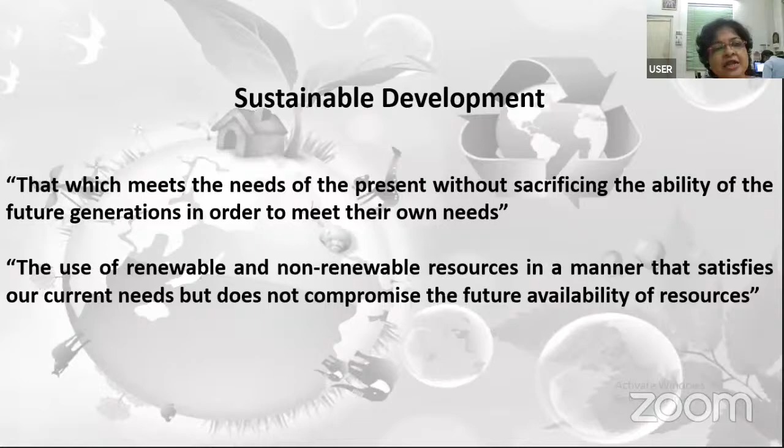Now, before directly going to our topic, let us first discuss or share the result where we want to reach, because we already know where we are. We are going to throw away our waste material. We are going to overlook the outcome that is going to be generated from various factories, various establishments, various sectors. This is our current scenario.

But the time has come to be aware of where we should reach at this current time. So that's why we are going to share in which way we can derive some kind of profit from the material for which we are not going to bother.

Just see, if we consider a typical community with 1 lakh population, per day the average waste produced is 50 tons, with 70% wet waste. 70% wet waste means 35 tons are wet waste.

Now see, in the subsequent slide, we will discuss the various technologies or processes by which we have to think of deriving wealth or energy from the waste. This particular slide, in a nutshell, will let us know where we should reach, and whether the time has already come to think in this direction. So this particular slide will give you a roadmap for our future steps.

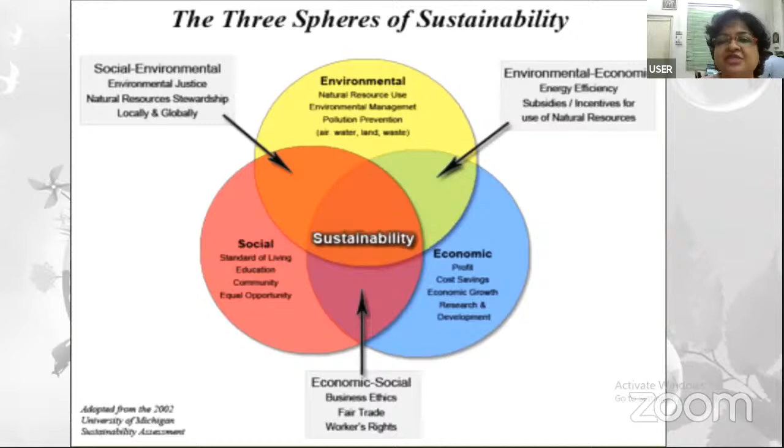So that's why we are coming to discuss circular economy now, because from that particular concept of TBL, triple bottom line, we come to discuss this circular economy. The concept of circular economy was first raised by British environmental economist Pearce and Turner in 1990.

Traditionally, an open-ended economy was developed with no built-in tendency to recycle, which was reflected by treating the environment as a waste reservoir - whatever waste is generated, throw it away, we should not bother about that. But what is the aim of circular economy? Why is this circular economy coming ahead in this current generation, in this current scenario?

Because again, the concept of Deming's wheel has come - PDCA, Plan, Do, Check, Act. It is not an open-ended thing, it is a circular one, a continual approach. We have to reduce the resource so that the system functions in an optimal way.

We are talking now about the establishment of a special economic zone - that is the implementation of the approach of circular economy, because you know that a thermal power plant is going to generate a lot of ash.

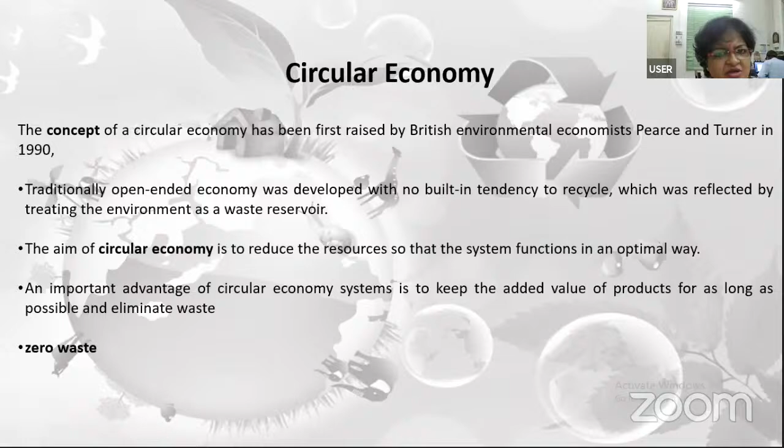Should we ignore that ash? No, because if we ignore it, the company has to bear its transportation cost, disposal cost, etc. But if we think of the concept related to special economic zone, that means if any Portland Pozzolana cement manufacturing industry can be established very near the thermal power plant, then for that industry, the raw material will be that ash. So collection of raw material from thermal power plant to that cement industry will not have any long distance issue, so the transportation cost will be reduced, sometimes zero, and the disposal cost for the thermal power plant will become zero. So the total country will incur a lot of benefit. This is nothing but the circular economy.

This circular economy concept we are going to follow in this particular approach. The name of that approach is cradle to grave management. Cradle to grave management is the product life cycle, throughout the life cycle of the product, from incorporation of the raw material up to getting the finished product. There is the possibility of generation of waste at each and every corner. So at each corner, we have to think of reusing, recycling, recovering that waste, so that it can be utilized for the same unit as raw material or intermediary material, or if not possible, then it can be utilized for other units, other factories, other enterprises.

What is found, as I explained in case of thermal power plant versus Portland Pozzolana cement manufacturing unit, ash is getting taken as raw material for the cement manufacturing unit. In this way, the transportation cost of raw material or disposal cost of waste will become zero, and the company will incur benefit. This strategy aims at taking into account sustainability impact - environmental, economic, and social issues that a product or service will have throughout its life cycle, from cradle to grave. Throughout the life cycle of the product, we have to think of optimal utilization of the resource. And as you optimally utilize the raw material, the generation of waste will also be optimal.

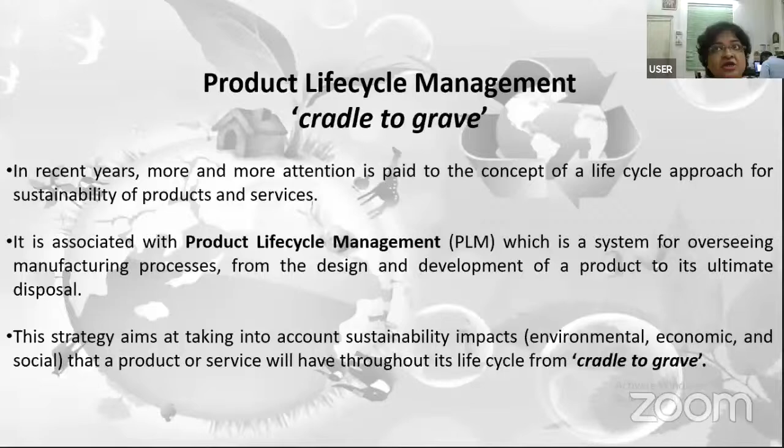Now let us discuss this particular fact. If we always talk from theoretical perspective, it will be boring. So let us discuss some case study to show the sustainability.

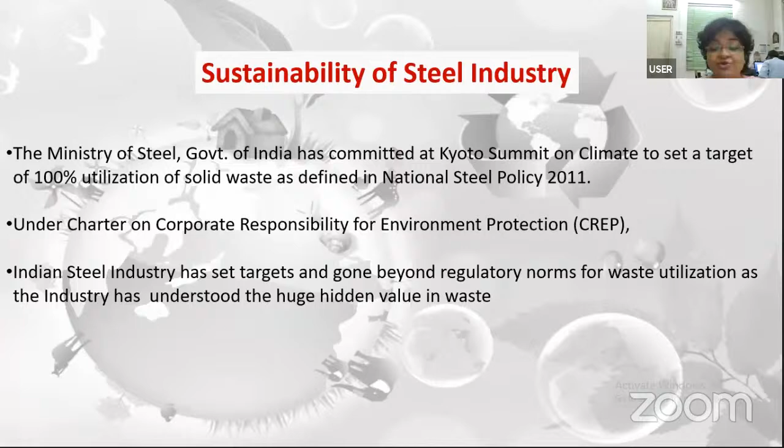Suppose we take the example of the steel industry. The Ministry of Steel, Government of India has committed at the Kyoto Summit on climate to set a target of 100% utilization of solid waste as defined in the National Steel Policy. Now our question is, in which way have they committed? Definitely they have certain proof that they are capable of doing the same, because India's steel industry has already set targets and gone beyond regulatory norms for waste utilization, as the industry has understood the huge hidden value in waste. So we should know the sustainability indicators for steel industry. Once we find out the sustainability indicators, only then will we be able to adopt a strategy for implementation.

Here are certain indicators. If we think of conservation of natural resources used in steel making, like coal etc. If we think of reduction of greenhouse gas emission. Third indicator, volatile emission reduction. Fourth indicator, landfill waste reduction. And fifth indicator, hazardous waste indicator. So these are the various sustainability indicators based on which the steel industry is thinking of deriving wealth from waste.

Now, one by one, we are going to see in which way they are thinking of that. In a nutshell, in the steel industry, the inevitable wastes are slag, dust, fines, slurries, various scales. All integrated iron and steel plants produce a wide range of byproducts, and processes are being continually optimized to reduce the amount of byproducts generated. These byproducts are often termed as waste. So under waste, they have focused on slag, dust, fines, slurries, and various scales.

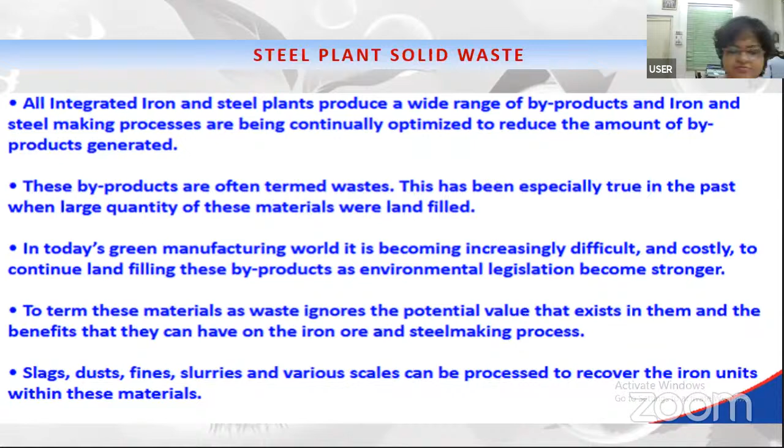Now, for doing that, again theoretical concept, we are going to follow this concept: reduce, reuse, recycle, recovery, and finally landfill. So from most favored option to least favored option, we have to go ahead. Whenever we find there is the opportunity or scope of generating waste at a particular location, first we have to think: now we have to reduce, to lower the amount of waste produced. Next concept is reuse: how to use that material repeatedly.

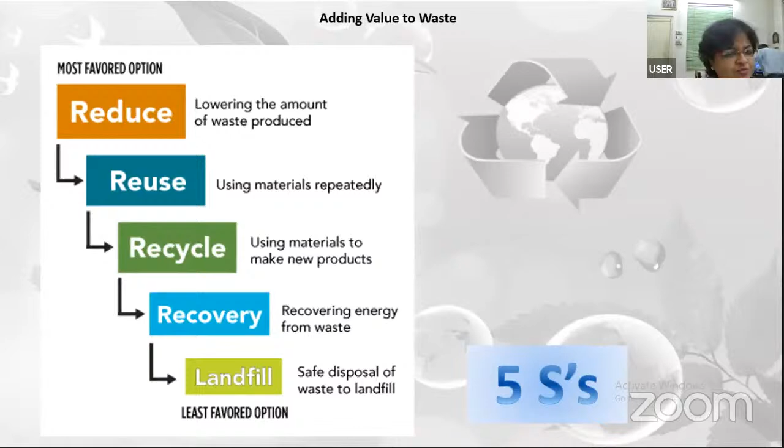Third, recycle: how to use that material to make any new product or intermediary product. Fourth, recovery: how to recover energy from waste. And if all these four steps fail, then finally is the landfill. But that should be the safe disposal of waste to landfill.

Now, what are the reasons why we are going to think of so many strategies? Definitely there are some advantages, some benefits. What are the reasons, one by one? First, it preserves natural resources by decreasing the demand for virgin materials, so there will not be over exploitation of natural resources. We are going to think of natural resource conservation.

We will conserve energy. We will be able to reduce greenhouse gas emissions, which cause global warming. Definitely that is not expected by us. In this way, we are going to reduce the demand for products made from energy-intensive manufacturing processes.

Thus, we will be able to save money by decreasing disposal cost. In case of a thermal power plant, if they can easily transport ash to the Portland Pozzolana cement manufacturing unit, the disposal cost will become zero for the generator. Similarly, the material cost and transportation cost of raw material for the cement manufacturing unit will also become zero. So in this way, we are thinking of adoption of special economic zones.

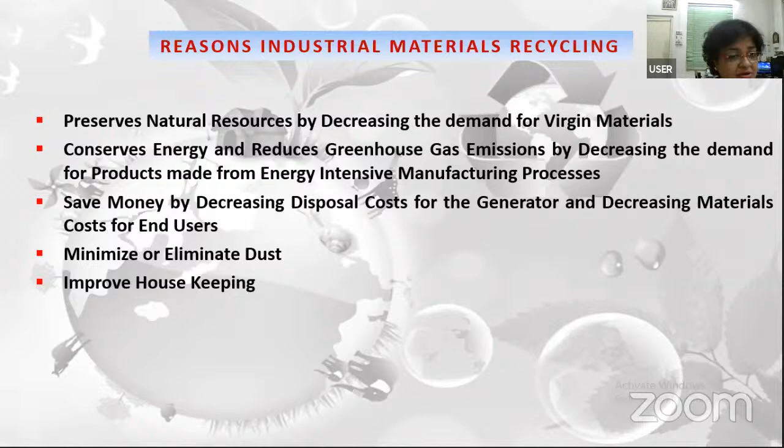Fourth benefit, we are going to minimize or eliminate dust. And finally, we are going to improve housekeeping. So our whole ambience, from health, safety and environment point of view, is going to be neat and clean, which will cause the betterment of our life.

So already we have discussed the various wastes coming out from the steel making industry. Now it is clear that the waste generated from steel making industries are slag, dust, fines, slurries, and various scales. If we categorize these wastes, they can be grouped into 4 major divisions: one is iron and steel slag, second is scale, third is scrap metal, and fourth is dust and sludge.

Once this classification is made, it becomes clear how we will think of deriving wealth from waste. Depending on the type of waste, this classification is very important because it will be easier to adopt future strategy for the same. We can think of it as a source of energy or raw material for steel fabrication, or else it can be traded as a co-product to other industrial applications. So the reuse of this product is of great importance for the sector, both from economic and environmental points of view.

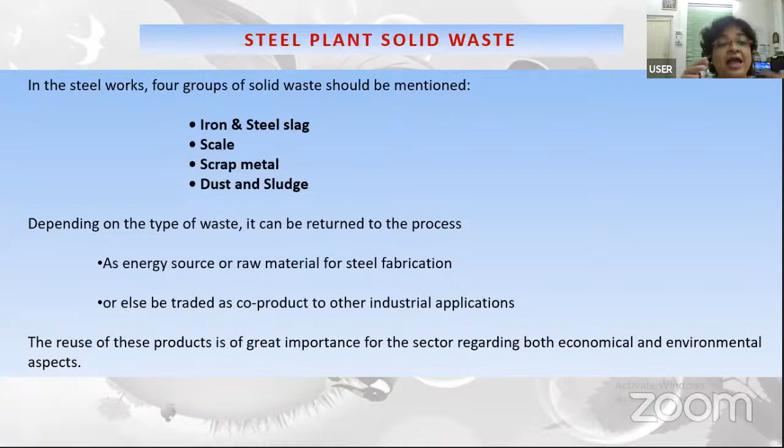Now, in which way are we thinking of utilizing, recycling or recovering that waste? You know that iron oxide fines are generated in various units - from blast furnace, from LD converter, from mills. Coarser sizes of these fines can be used in sinter plants. It can also be used in pelletization, though pelletization is a cost-intensive process due to its high temperature curing.

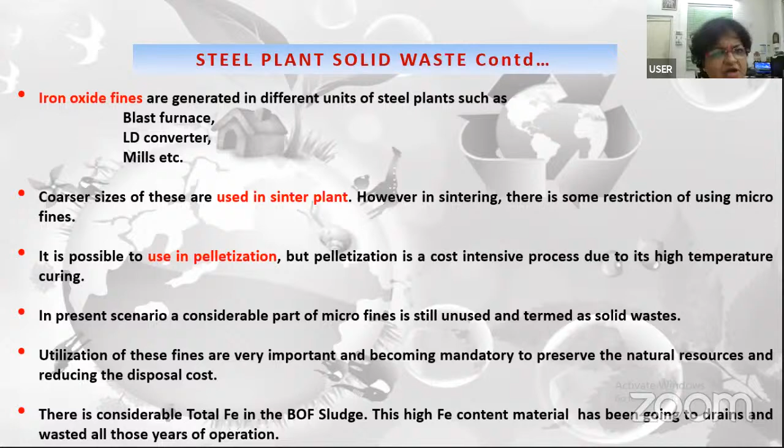So we have to think, because there is considerable total iron in the BOF sludge. This high iron content material has been going to drain and wasted all these years of operation. So we have to find out whether there is any scope to reutilize, recycle or recover that iron. Yes, definitely there is scope. Just we will go to see.

Recycling of dust and sludge becomes possible only after solving the technological problem related to giving them forms, allowing their use as feed material. So dust recycling is realized as outside recycling in cement plants, or at the plant where dust is recirculated to the process. One by one, we will highlight in which way those dust and sludge can give us some recovered item from waste. There are numerous methodologies and techniques, like collecting fine dust, sludge and mill scale and agglomerating them into micro pellets to use in the sintering plant or blast furnace as a substitute for iron ore.

We should not use high iron containing oxide for micropelletization and use it as substitute for low value iron ore, when that rich iron oxide can be recycled as high value coolant for BOF, basic oxygen furnace. Numerous attempts have been made in the past, in India and abroad, to agglomerate those fine particles of iron bearing material.

By mixing them with a binder and forming into briquette. In which way we are going to prepare briquette? We are going to agglomerate SMS or BF sludge. SMS means steel melting shop, or blast furnace sludge. We add calcium hydroxide, we add mill scale, we add water soluble molasses, we add silicate of soda. In this way, we are going to prepare briquette.

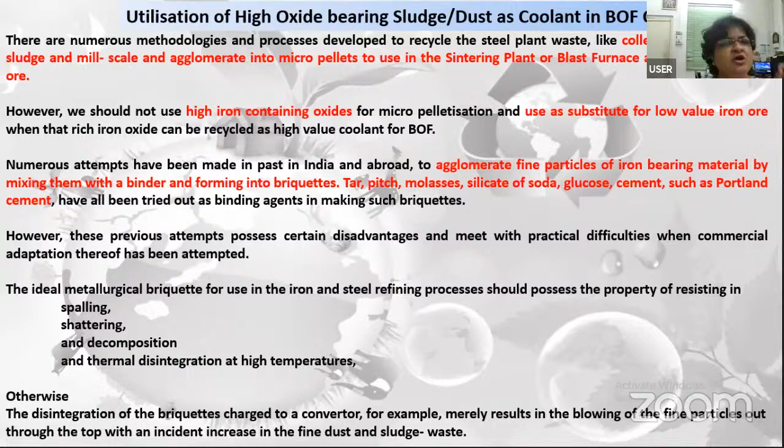That's why we have to take special precaution at the time of recycling or recovering this item. A briquette made from a mix of SMS or BF sludge, calcium hydroxide, mill scale, with a binder of water-soluble molasses and silicate of soda, is capable of withstanding thermal disintegration, but it requires a drying period before it can be handled or stacked.

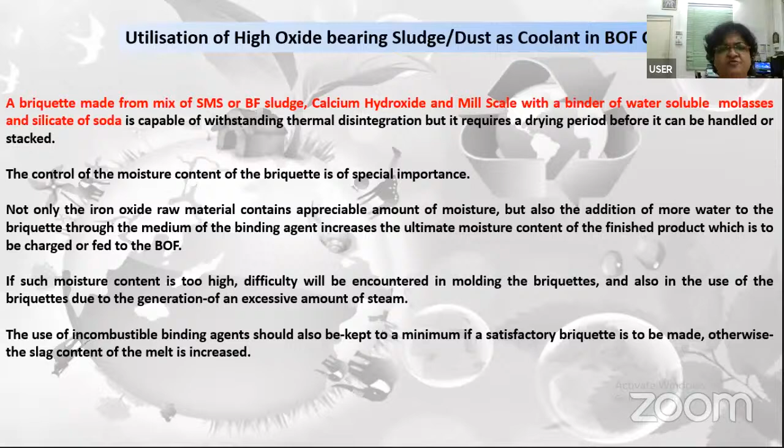The control of moisture content is of special importance. Not only does the iron oxide raw material contain appreciable amount of moisture, but also the addition of more water to the briquette through the medium of the binding agent increases the ultimate moisture content of the finished product, which is to be charged or fed to the BOF. So this metallurgical process requires special precautionary measures for formation of briquette.

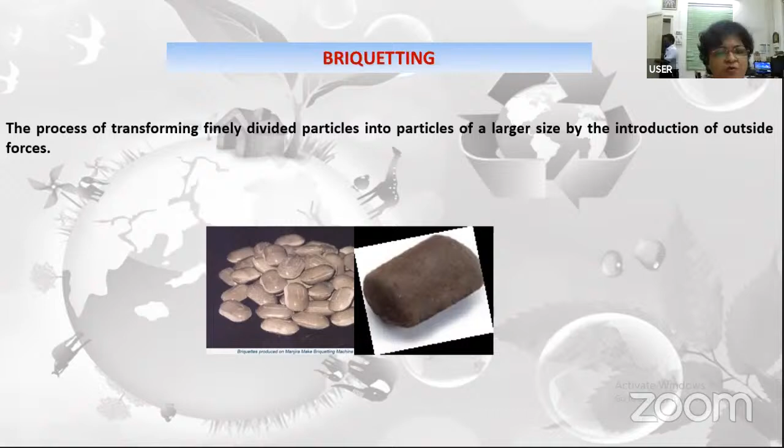This is the structure of the briquette: how we are going to transform the finely divided particles into larger size, which is named as briquette. By the introduction of outside forces, we are going to form this briquette. This is the technological process of how to prepare this briquette.

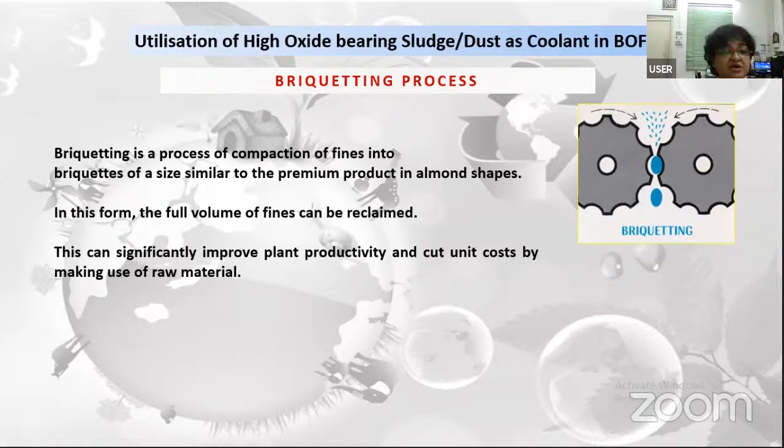Briquetting is a process of compacting fines into briquettes of a size similar to the premium product, in almond shape. In this form, the full volume of fines can be reclaimed. This can significantly improve plant productivity and cut unit cost by making use of the raw material.

So it is clear that a satisfactory and successful briquette for commercial use should possess sufficient compression strength and can withstand the rigorous handling to which it is subjected, such as conveyors, loading and charging devices. Steel industry has successfully prepared briquette of a mix of BOF sludge and only molasses, which had shown good result when charged to the BOF as coolant.

So we are taking this chemical formula in this way: if a mix of high iron oxide sludge, that is total iron more than 60%, dried to less than 8% moisture, with mill scale, quick lime fines and suitable binders, is briquetted and cured over 110 degrees centigrade for a desired period, it will give good results as a substitute coolant for BOF.

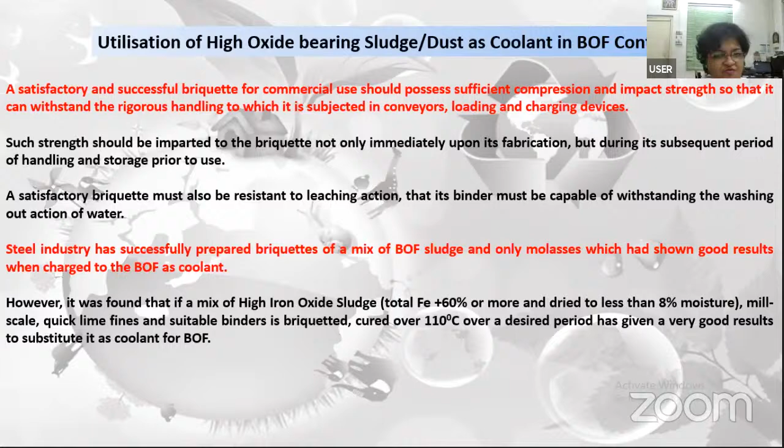Now let's see the advantages of this briquetting. The process of briquetting technology is simple, but some difficulty is in the binding, that's why we are always warning about its metallurgical process. We have to take precautionary measures. Briquetting is an environmentally friendly method of agglomeration. There are two kinds of benefits generated: economic benefit and ecologic, that means environmental benefit.

Economic benefit is it avoids the loss of product in dust form. Uniformity of product is obtained. Dust volume is reduced. And we are thinking of recycling the product at high value added.

And what is the environmental solution? Environmental solution is, it is associated with producing and dispersion of dust. The problem solution solves this problem, and therefore it causes a good atmosphere, and ground pollution is reduced.

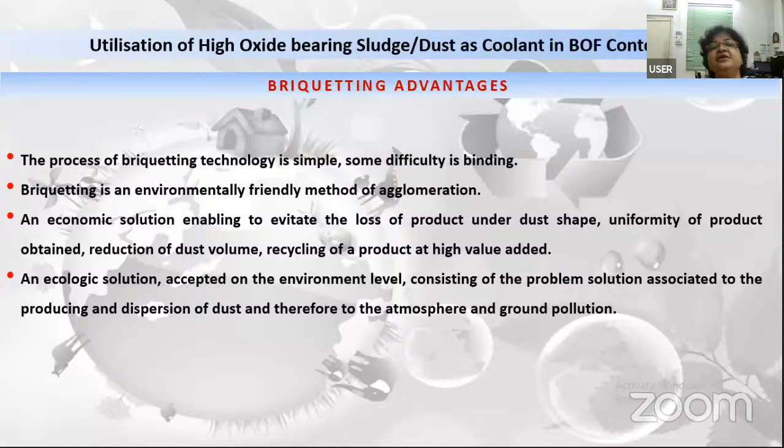Now let's see which company has adopted this particular technology. In Great Lakes Steelwork, briquettes were made from mill scale and ESP dust mixed in 1:4 ratio, and high to medium slopping was observed when used in BOF as coolant. An increase in the hot metal ratio by 3.38%, and 100% steel scrap was replaced with a 13:5 ratio of scrap to briquette. So this is the advantage.

Mr. S. R. Balajee, P. E. Callaway, Jr L. M. Kilman, and L.

Lohman stated in a steelmaking conference proceeding in 1995 that they briquetted BOF waste oxide with 35% dewatered sludge and 20% girt, with 45% mill scale, using molasses and lime as binder, and recycled the briquette to the BOF shops of Inland Steel, and they have been successful. They found that 2.2 tons of waste oxide briquette replace 1.1 tons of scrap, increasing metallic yield and accommodating more hot metal. This is the competitive advantage that the company is going to gain.

McLouth Steel, in collaboration with Horse Head Resource Development, used iron-rich materials both as flux and iron source in the basic oxygen process, and IRM was found to be a good substitute for fluorspar, lime, and iron ore, together with increased steel yield by 0.4% and decrease in dolomite, lime, and oxygen consumption by 5% and 1.5% respectively.

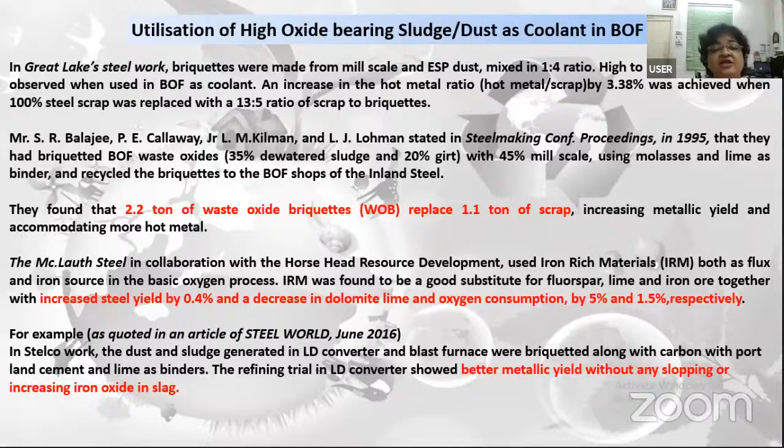Similarly, in Stelco's work, dust and sludge generated in the LD converter and blast furnace were briquetted along with carbon, with Portland cement and lime as binder, and refining trials in the LD converter showed better metallic yield without any slopping or increase in iron oxide in slag.

These are the benefits. The use of iron-rich GCP sludge will reduce the existing coolant addition in the BOF converter. One by one, you will be able to find out in which way this recovered item will give us benefit, will give us wealth, how we are going to derive wealth from waste.

The reduced oxygen consumption is another benefit, as the presence of oxide is high in the GCP sludge. Further, the converter sludge briquettes having a high percentage of lime would also reduce lime consumption.

At an approximate estimate, about 200 to 300 tons per day of sludge, mill scale, LF dust, and graphite dust can be converted into briquette with suitable strength and quality to replace present coolant material.

The existing coolant material being substituted by the proposed briquette has a market price. Just see the market price, 17,000 to 18,000 per ton. And automatically, the annual savings of existing coolant material works out to a significant figure.

43,200 tons at an average production. They have used 200 tons of briquettes, and these briquettes will replace around 135 tons of coolant per day. Just multiply it by 320 days, you get 43,200 tons, which are going to be replaced by 200 tons of briquette.

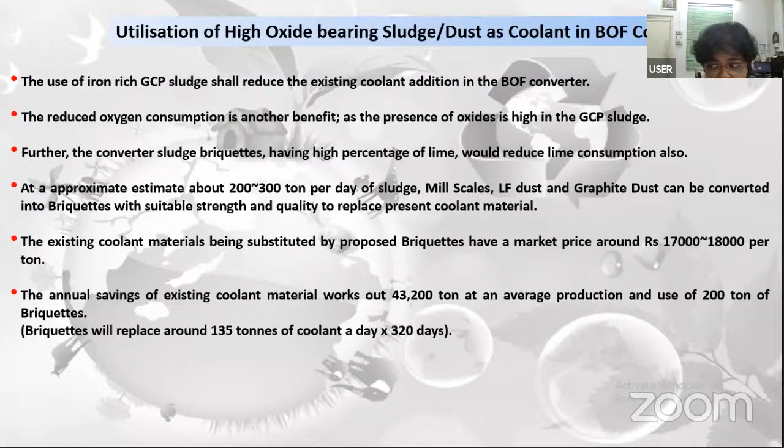So if you focus on the angle of financial benefit, annual cash savings will be 43.2 crore. So this is the benefit, this is wealth from waste. 43.2 crores per annum cash can be accrued from waste, the waste that we are going to overlook.

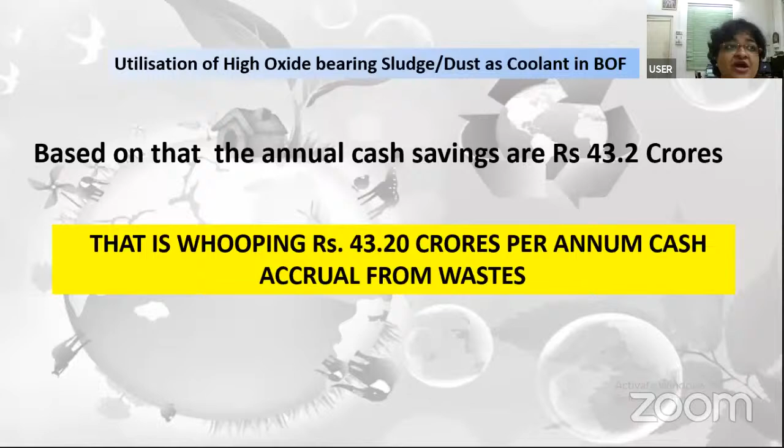So in a nutshell, what are the benefits of this proposal for the steelmaking industry? It fulfills the goal of zero solid waste discharge and complies with Central Pollution Control Board directives, which are likely to be strictly enforced very soon. The inherent value of available iron in the sludge is going to be utilized, which is just being dumped outside.

At Bhilai Steel Plant, SAIL, they are going to save 43.2 crore amount only on the cost of replacing coolant material.

Energy is going to be saved, which was wasted for disposal of sludge in the form of slurry. Expenditure required in maintaining the disposal mechanism like slurry pumps is going to be saved. Pollution hazard related to handling and storage of sludge in the ash pond is going to be eliminated. Dust is going to be minimized or eliminated, and housekeeping is going to be improved due to the adoption of Swachh Bharat.

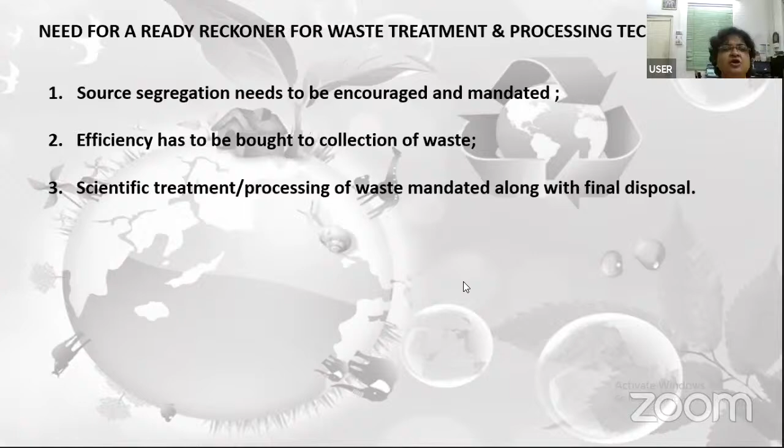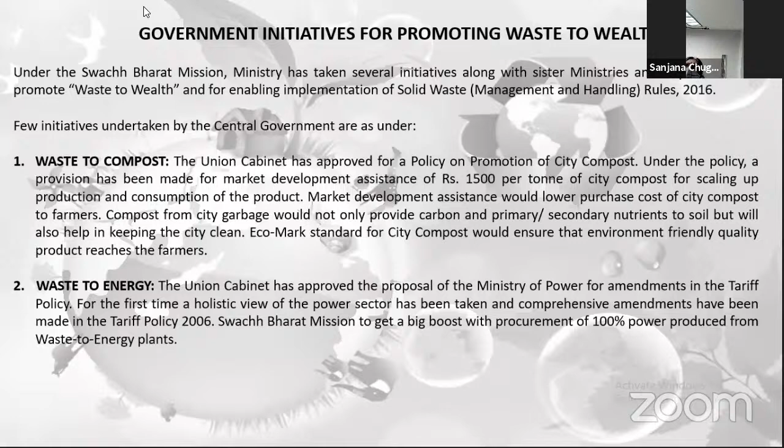We will now go to see what is—yes. Any confusion? No, I think so. Now let me discuss what are the government initiatives for promoting waste to wealth.

First, we should know in which way the government is taking care of this. Under the Swachh Bharat Mission, the ministry has taken several initiatives along with sister ministries and departments to promote waste to wealth and to enable implementation of Solid Waste (Management and Handling) Rules. A few initiatives have already been undertaken by the central government.

First is waste to compost. The Union Cabinet has approved a policy on promotion of city compost. Market development assistance will lower the cost, and with this promotion of city compost, the purchase cost of city compost for farmers will automatically be lowered. Compost from city garbage would not only provide carbon and primary or secondary nutrients to soil, but will also help in keeping the city clean. So these are the advantages behind this policy.

Next policy, waste to energy. The Union Cabinet has approved the proposal of the Ministry of Power for amendment in the tariff policy. For the first time, a holistic view of the power sector has been taken and a comprehensive amendment has been made.

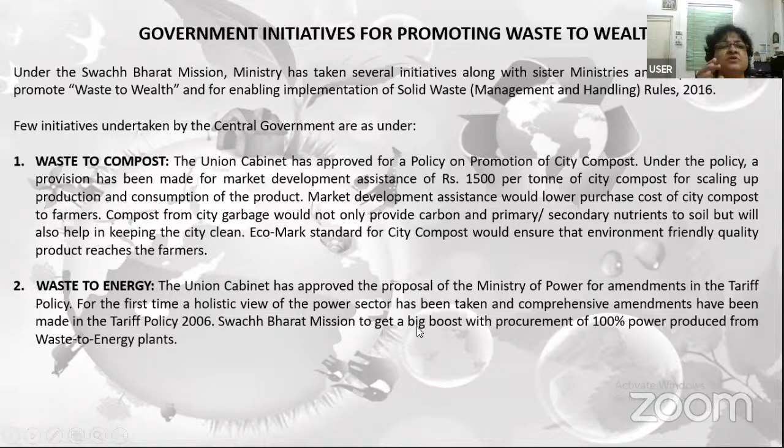Third is the policy on construction and demolition (C&D) waste, to minimize the quantity of inert material reaching landfills and to promote reuse and recycling of construction waste. The Bureau of Indian Standards has amended the specification for coarse and fine aggregate for concrete.

The fourth is the plastic waste disposal technique. A government order in November 2015 made it mandatory for all road developers in the country to use waste plastic along with hot mixes for constructing bitumen roads within a 50 kilometer periphery of any city with a population over 5 lakh. In recently released guidelines for developers, the government has also made it mandatory that in case of non-availability of waste plastic, the developer must seek the Road Transport and Highways Ministry's approval for constructing only a bitumen road.

Now, what is the advantage of this plastic tar road? The strength of the road increases, there is better resistance to water and water stagnation, no stripping, no potholes. The binding nature improves with better bonding of the mix, and load-withstanding property increases. Overall consumption of bitumen is reduced, voids in the aggregate are reduced, and there is less rutting and raveling. The soundness of the property improves, maintenance cost is almost nil, road life is substantially increased, there is no leaching of plastic, and no effect of radiation like UV.

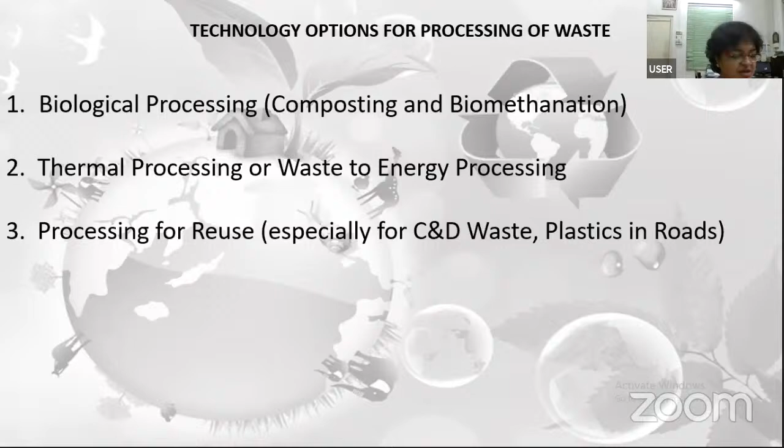So the technological options in a nutshell are 3 kinds: biological, thermal, and processing for reuse. If you see this flow chart, it will be clear. As I told you, in waste management practice, before thinking of any treatment or recycling technique, first we have to do segregation based on nature. Here also, before thinking of treatment technology, we have segregated municipal solid waste into 4 major groups: biodegradable, combustible, construction and demolition waste, and inert.

For biodegradable waste, which technology will be fruitful? Composting and biomethanation. In case of combustible product, gasification and incineration. In case of construction and demolition waste, that is nothing but alternate building material. And for inert, landfill.

Now composting will give us biofertilizer, and biomethanation through anaerobic digestion will give us biogas. Gasification of combustible product under thermal process will give us power. Incineration under thermal process of combustible product will give us steam turbine, and pyrolysis also under thermal process will give us steam turbine. And from construction and demolition waste, we will be able to prepare alternate building material. Now, one by one, each technology we will discuss.

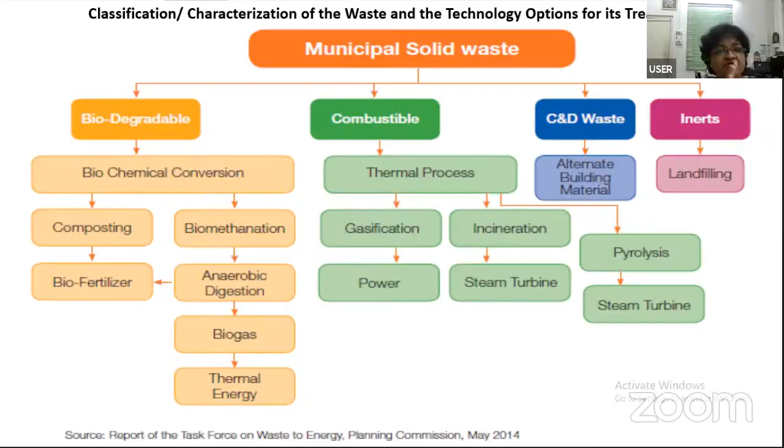First, under biological or biochemical processing technology, the first classification was composting and biomethanation. Now, when is composting applicable and when is biomethanation applicable? Biochemical conversion of biodegradable municipal solid waste can be categorized into two divisions: composting and biomethanation.

Composting is an aerobic process in which biodegradable waste is converted through biochemical transformation to yield city compost, which is used as soil conditioner and nutrient provider. Whereas biomethanation is an anaerobic slurry phase process used to recover nutrient and energy content in biodegradable waste, and the biogas can be used either as a source of thermal energy or to generate electricity.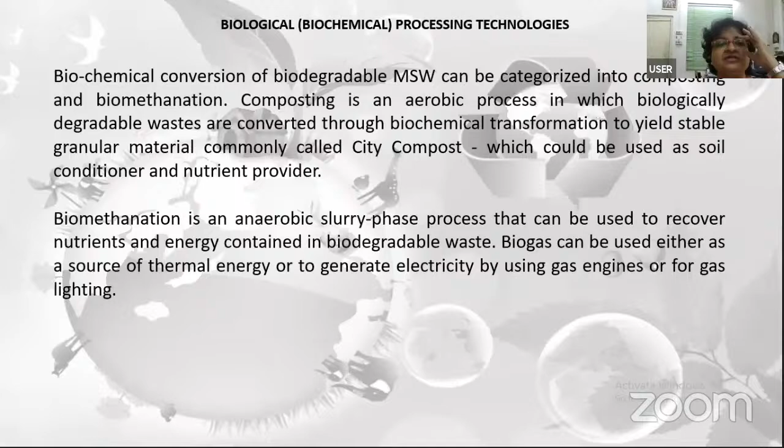Now let us see composting. Composting involves aerobic conversion, breakdown of organic waste by microorganisms in the presence of air, heat and moisture. It is done by various bacteria, fungi, actinomycetes, which act upon waste to convert it into sugar, starch and organic acid, resulting in city compost. The benefits: economic benefit, it improves soil condition, water retention capacity of soil gets enhanced, biological activity gets increased, and pest resistance of crops gets improved.

Composting minimizes or avoids greenhouse gas emission from waste. It is also useful as organic manure, containing macronutrients - that means NPK, nitrogen, phosphorus, and potassium - as well as micronutrients. It reduces dependency on chemical fertilizer. This compost can also be used to revitalize impoverished soil and wasteland.

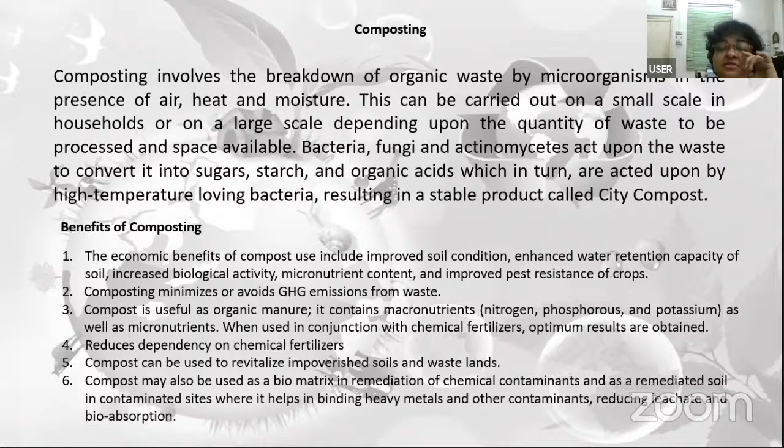Now there are different methods under composting. This is windrow composting - production of windrow, meaning long rows. Windrow composting is production of compost by piling of biodegradable waste. This method is suited to produce larger volumes of compost, and rows are regularly turned over to improve porosity and oxygen content, mix in and remove moisture, and redistribute cooler and hotter portions of the piles. In this way, we produce the compost.

For windrow composting, usually organic waste is used, and a minimum of 100 to 1000 tons per day are utilized. Total area requirement is 12,500 to 1,85,000 square meters. Capital investment is 650 lakhs to 5,500 lakhs. And how much compost is generated? 15 ton per day to 175 ton per day of compost is generated through this process.

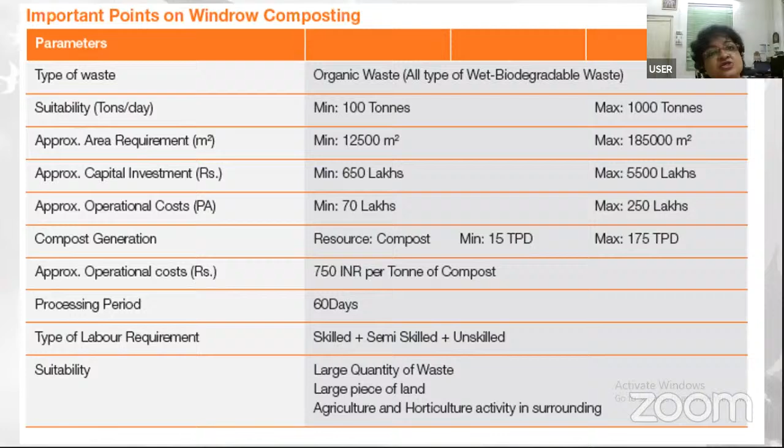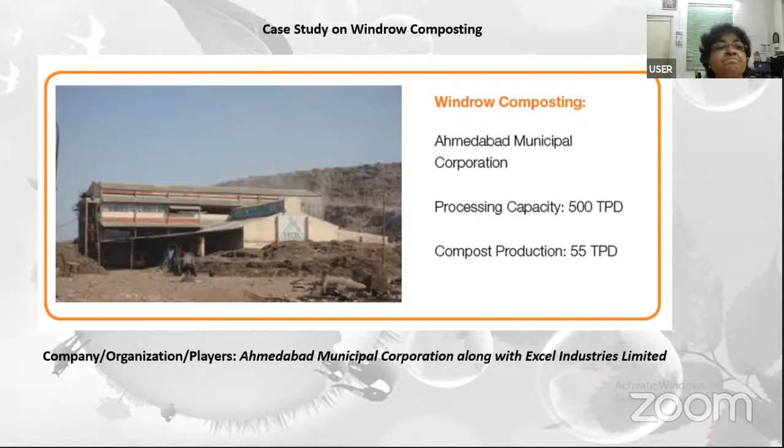Where have we implemented this? In case of Ahmedabad Municipal Corporation along with Excel Industries Limited, they have implemented this windrow composting method where processing capacity is 500 ton per day, and per day compost produced is 55 ton. If you want to know the detail, this is through PPP model, public-private partnership model. Ahmedabad, the capital of Gujarat, has covered this particular area.

Just see in which way - Excel Industries has signed a 30-year agreement with Ahmedabad Municipal Corporation in 1997 for 500 ton per day municipal solid waste processing for converting it into compost. And it is one of the highest producers of good quality city compost in India.

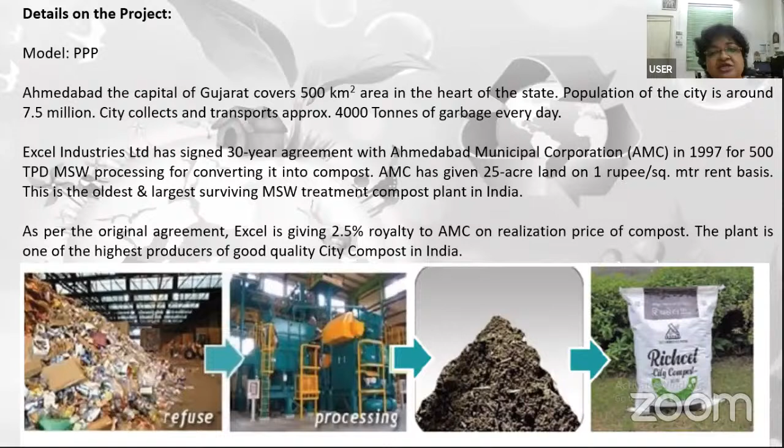Now, next topic - next type of composting is vermicomposting. Here we are taking help of various earthworms. Vermicompost is the product of the composting process using various species of worms, usually red wigglers, white worms, and other earthworms, which feed on a mixture of decomposing vegetable or food waste and release droppings called vermicast.

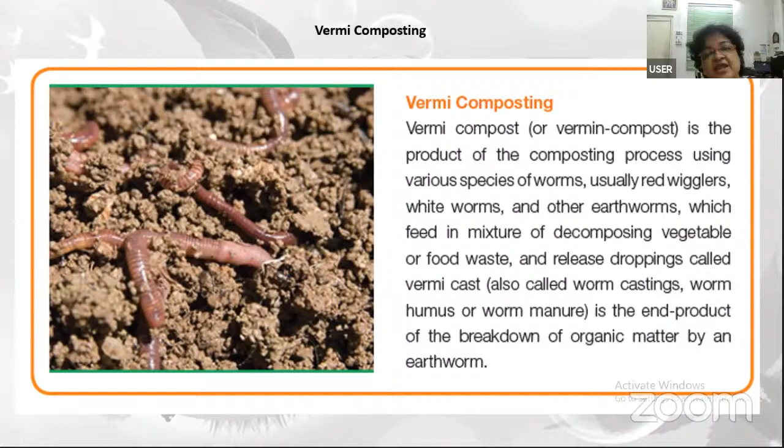It is the end product of the breakdown of organic matter by an earthworm. Here, in this case, also organic waste is getting involved.

Capital investment ranges between 25,000 to 2.5 lakhs. How much compost is getting generated? 0.04 ton per day to 0.8 ton per day, and production cost per ton of compost is 5,000 INR.

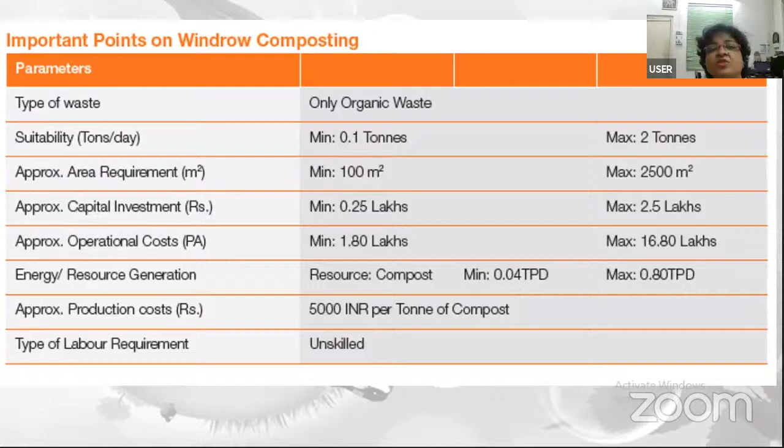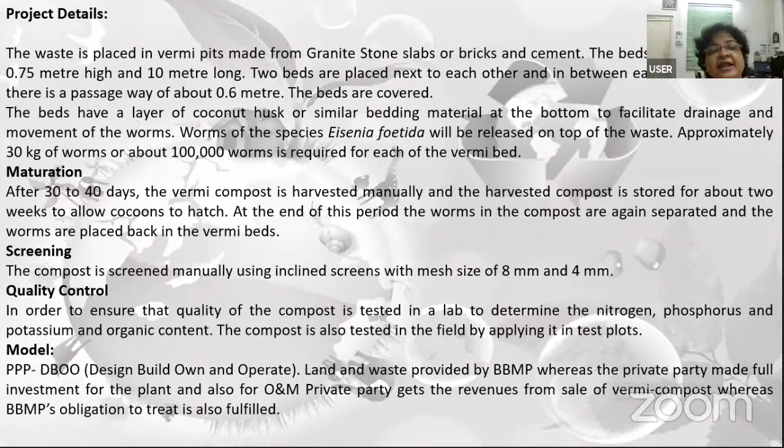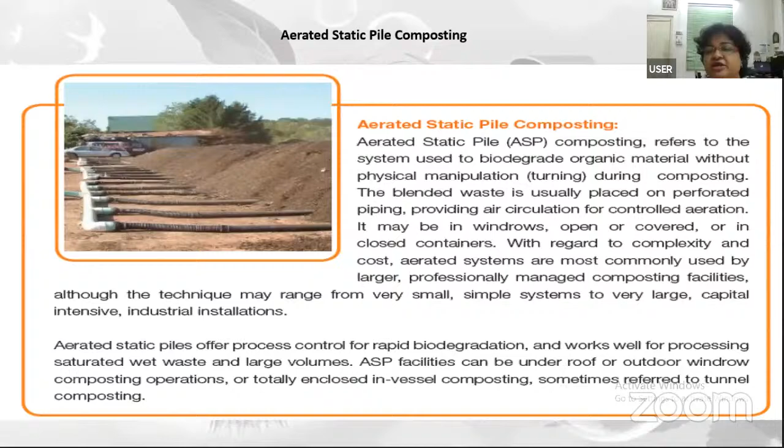So these are the methods by which composting is done; it is also referred to as tunnel composting. In the case of pure organic waste, this particular method can process 0.1 ton to 10 tons of waste per day, with approximate capital investment of 2.5 lakhs to 11 lakhs. How much compost is generated per day? 0.04 ton to 3.50 ton.

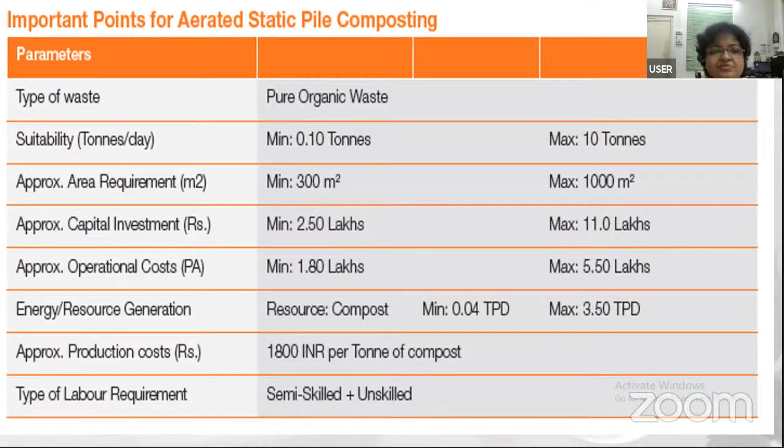Another method of composting is pit composting. Pit is nothing but a trench, where you get enough area. It is the process of burying organic waste directly into the soil. Trenching is an excellent method to use in combination with growing annual plants, especially plants like cabbage, corn, etc. It also encourages the development of deep water-conserving root systems. But this is a slower composting process than occurs in a well-managed windrow.

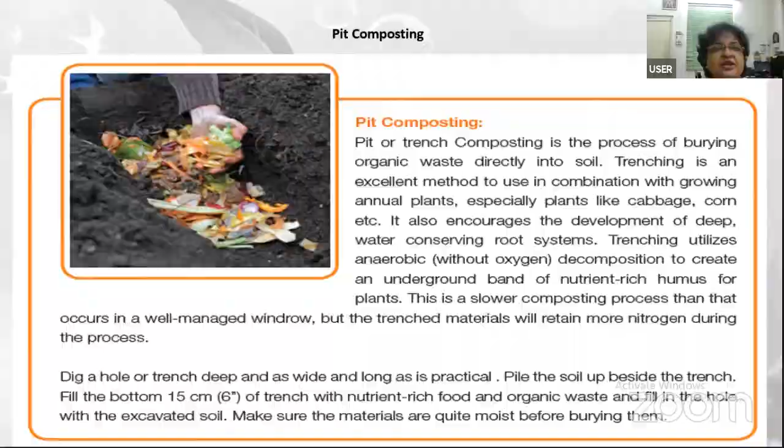So this is another method, pit composting. How much organic waste can be processed? 0.1 ton to 2 tons. Capital investment is 0.25 lakhs to 3 lakhs. How much compost is generated per day? 0.04 ton to 0.8 ton.

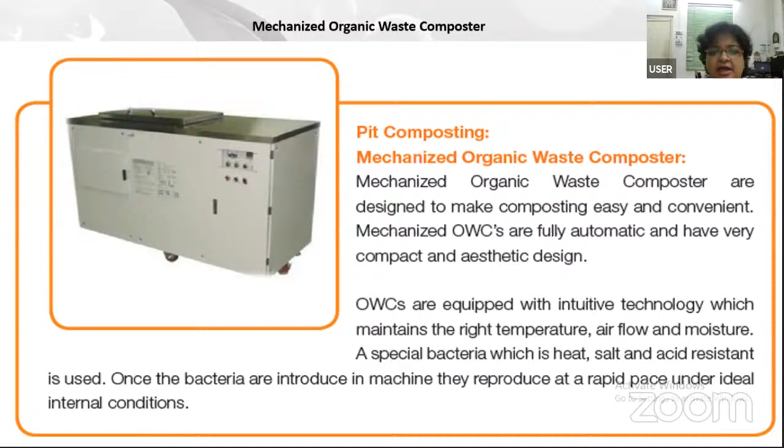This is the same method, but the previous one was a natural method, while this is the mechanized organic waste composter. This mechanized organic waste composter is designed to make composting easy and convenient, fully automatic with a very compact and aesthetic design. Here 100 kg to 5 ton of waste can be processed, and per day 30 kg to 1.5 ton of compost can be produced.

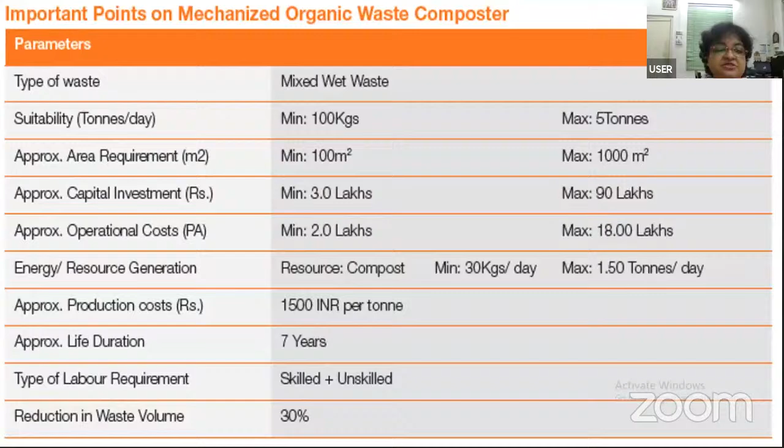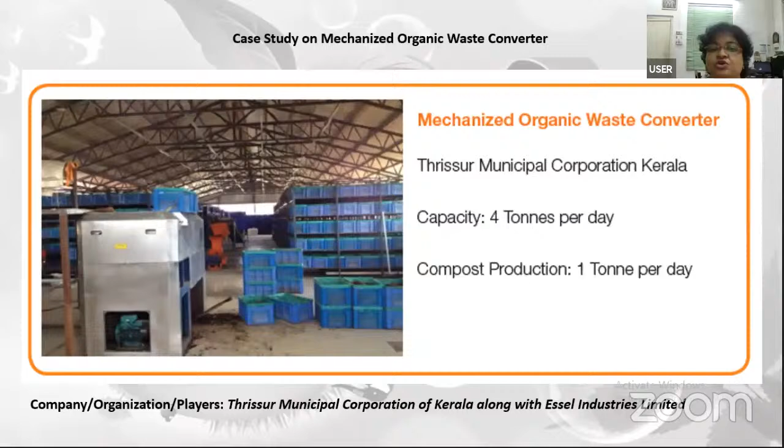In this way, 30% waste volume can be reduced. This method is already started in Thrissur Municipal Corporation of Kerala along with Essel Industries Limited, where 4 tons of waste per day is composted, producing 1 ton of compost per day. It is owned by Thrissur Municipal Corporation, again under the PPP model. The organic waste converter plant is located in the heart of Thrissur, right behind the bus station, and the cost of the 4-ton plant is 40 lakhs.

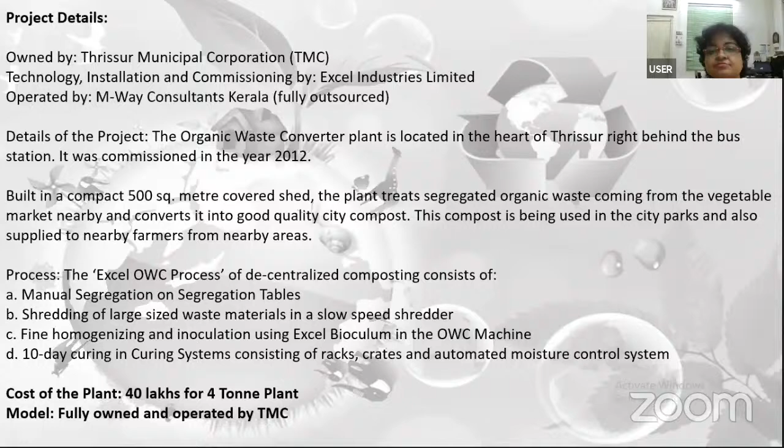Now, we found this heritage school where there is a hybrid composting based on a segregation model. The school set up a hybrid rapid composting technology system which converts biodegradable waste into organic manure in 2016. This process involves 3 steps: crushing, dewatering, and shredding. The machine capacity for horticulture as well as food waste is 300 kg per day, and it produces 20 to 30 kg of manure per day, which is used for gardening purposes.

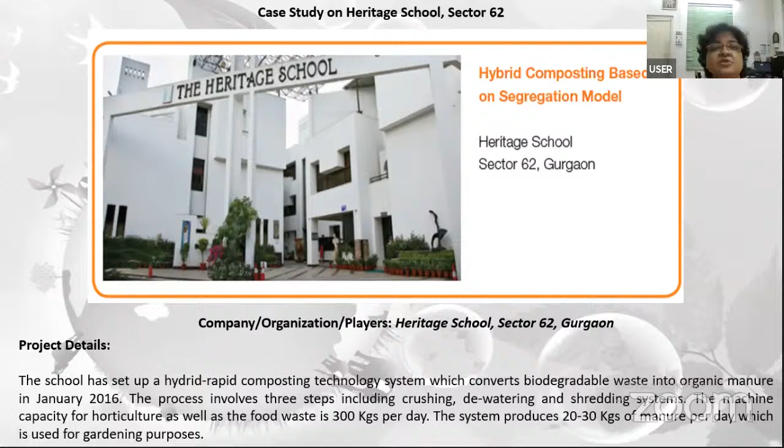Now, next after composting is biomethanation. Biomethanation is an anaerobic process, meaning absence of free oxygen, involving fermentation of biodegradable matter in an enclosed space under controlled conditions of temperature, moisture, and pH. Here, the waste mass undergoes decomposition due to microbial activity, generating biogas comprising mainly methane, carbon dioxide, and sludge. The benefit is that the produced biogas can be used for cooking, for production of electricity, and for light. This biomethanation of biodegradable organic material results in stabilized sludge, which can be used as a soil conditioner and fertilizer. This is very ideal for waste with high moisture content.

The important points: 0.5 tons to 300 tons of waste can be processed through this method. Capital investment is 15 lakhs to 9,000 lakhs. How much compost is generated? Actually, 0.2 megawatt to 3 megawatt of biogas is produced, and 40% waste volume is reduced.

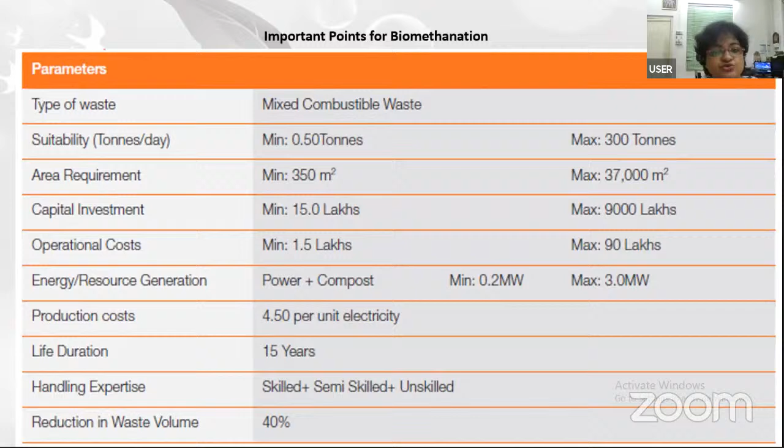This biomethanation plant is found in Govandi, Mumbai, at the Shatabdi Hospital site, where 2 tons per day of waste is being processed. This is the project site.

And here we are finding that...

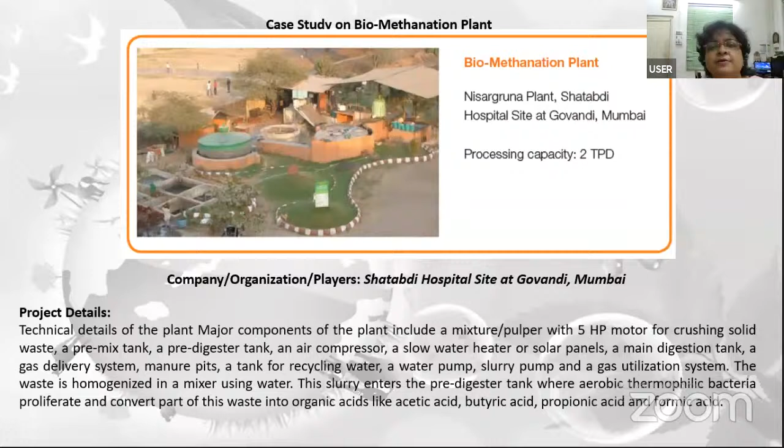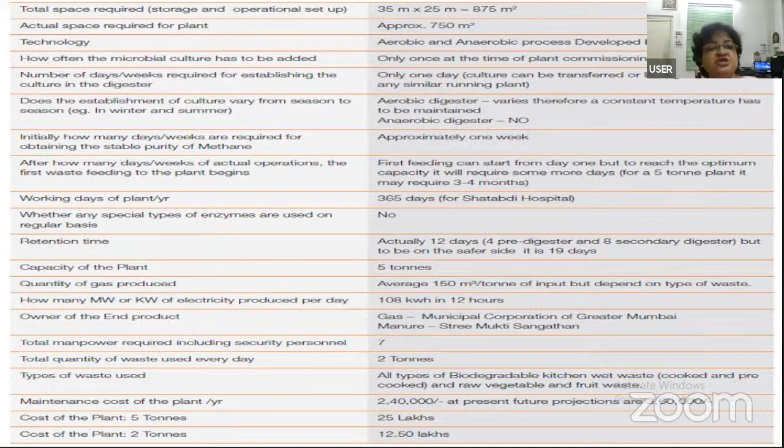The question is how many days or weeks are required for obtaining stable purity of methane. The answer is approximately 1 week is required for obtaining stable purity of methane. The capacity of the plant is 5 tons, and gas produced is average 150 cubic meter per ton of input, but it depends on the type of waste. How much electricity is produced per day? 108 kilowatt hour in 12-hour electricity is produced. How much waste is utilized every day? 2 tons of waste. Cost of the plant is 25 lakhs for 5 tons, and 12.5 lakhs for 2 tons.

Now, what kind of waste is getting processed here? All type of biodegradable kitchen wet waste, that means cooked and pre-cooked waste, and raw vegetables and fruit waste have been utilized here.

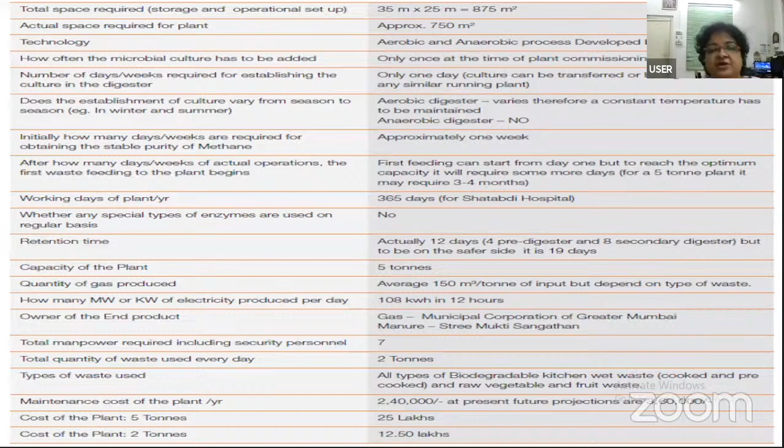Now, this biomethanation plant is also found in case of Koyambedu Wholesale Market in Chennai, Tamil Nadu. It is a unique national level demonstration project in order to utilize organic waste generated from the perishables market for power generation. You will find that 30 metric tons of perishable waste per day is handled through this method, and it will generate average 2,375 cubic meter gas through biogas induced mixing arrangement method, from which 5,000 units of electricity per day is generated.

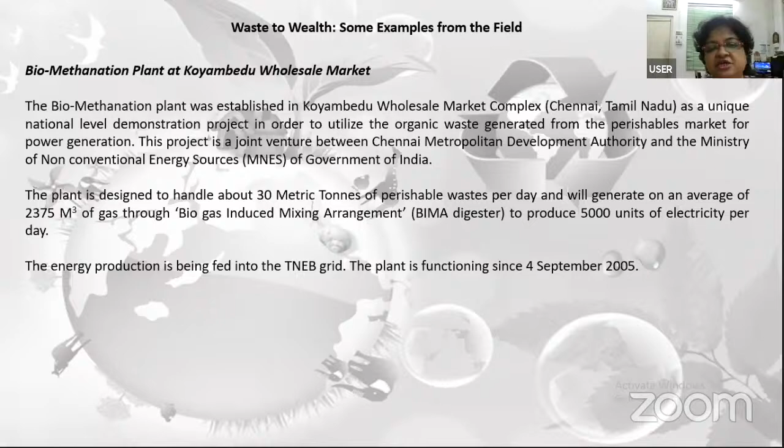Now the next method is thermal processing. Under thermal processing, the first one is incineration and the second one is gasification. Incineration is a waste treatment process that involves the combustion of waste at very high temperature in the presence of oxygen and results in the production of ash, flue gas, and heat.

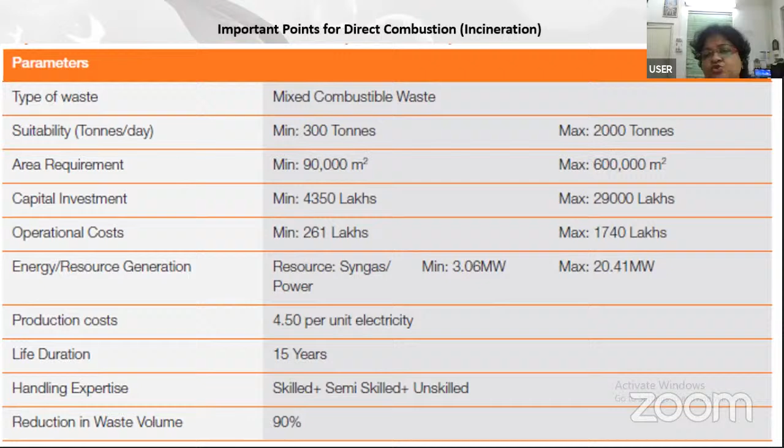It shows the important points. Time is running out, so in a nutshell, we will highlight the important points. Through this incineration, 3.06 megawatt to 20.41 megawatt power is used. This is the application of this incineration method in case of North Delhi Municipal Corporation, where 2,000 metric ton waste is processed and 24 megawatt power is generated.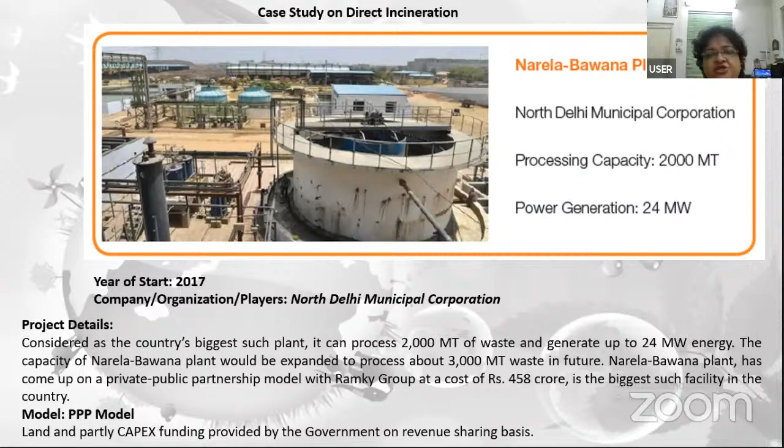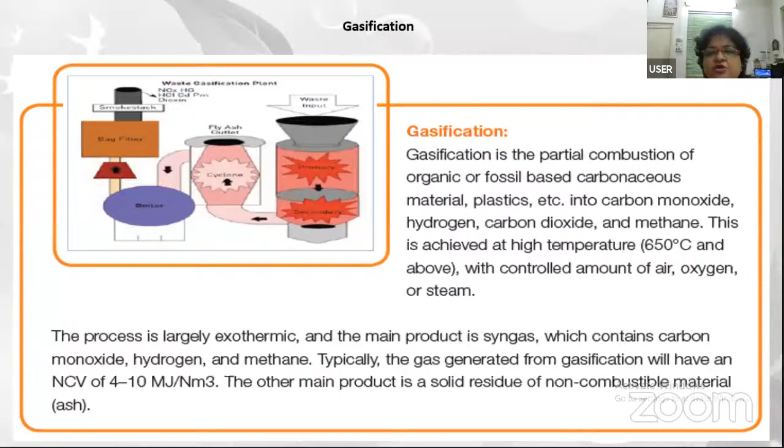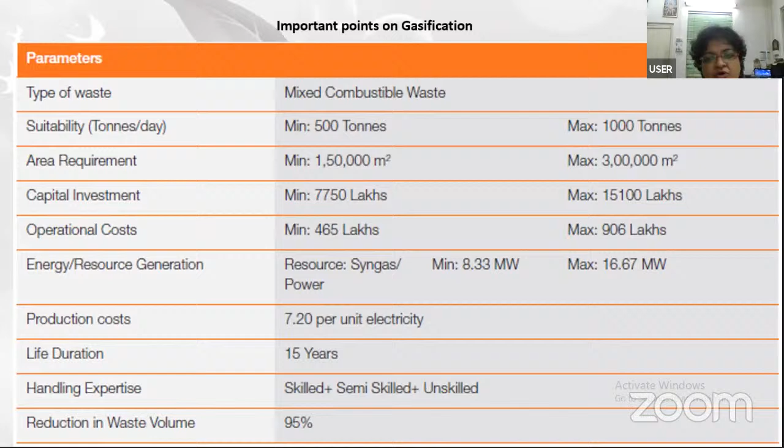Next item of thermal processing is gasification. Here also we produce power. Gasification is the partial combustion of organic or fossil-based carbonaceous material, and through this gasification process, 8.33 megawatt to 16.67 megawatt power is generated. It is found in case of Pune Municipal Corporation, where 700 tons of municipal waste is processed per day, and from where we produce 0.78 megawatt to 1 megawatt of power per day by processing around 250 metric ton of waste per day.

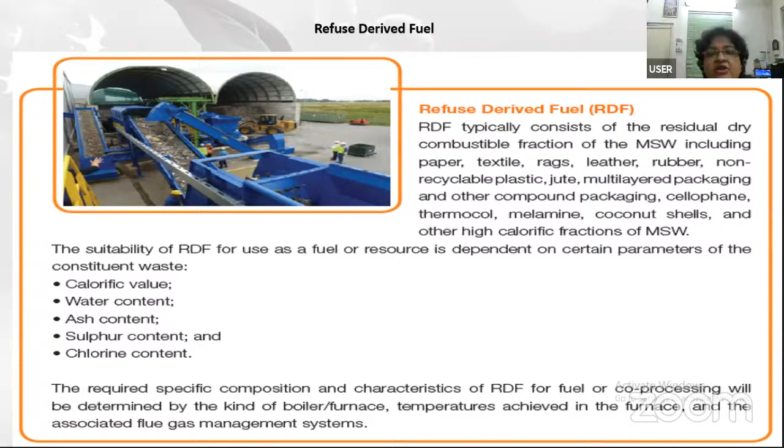Another technology is refuse derived fuel, RDF. RDF typically consists of the residual dry combustible fraction of municipal solid waste, including paper, textile, and rag. Its suitability depends upon certain parameters like calorific value, water content, ash content, etc. Through this method, how much energy is derived? 0.25 metric ton per day to 75 metric ton per day. Now, application of this refuse derived fuel is found in Jabalpur Municipal Corporation. Here is the project detail.

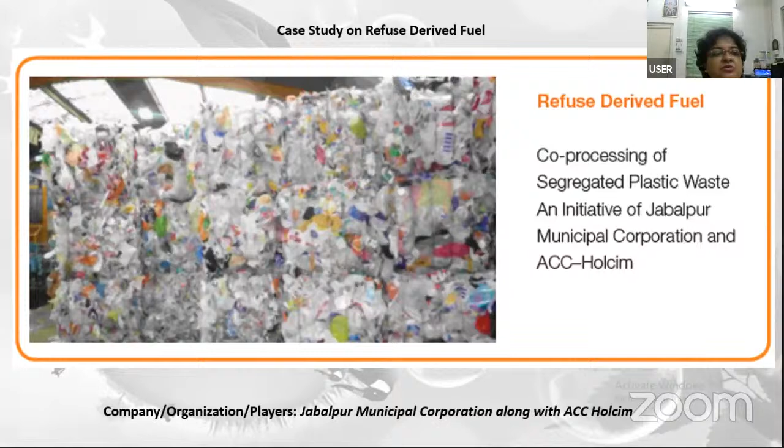Next is under C&D waste, that is plastic waste management, plastic and C&D. Under plastic waste management, we find approximately 14,000 ton per day plastic waste is generated, which is approximately 9% of about 1.5 lakh ton per day municipal waste in the country. There are two major categories, thermoplastic and thermoset plastic. Thermoplastic constitutes 80% and thermoset constitutes 20% of the total post-consumer plastic.

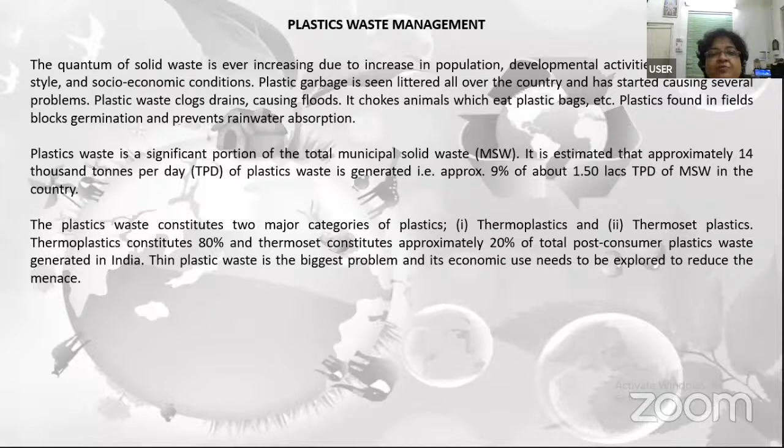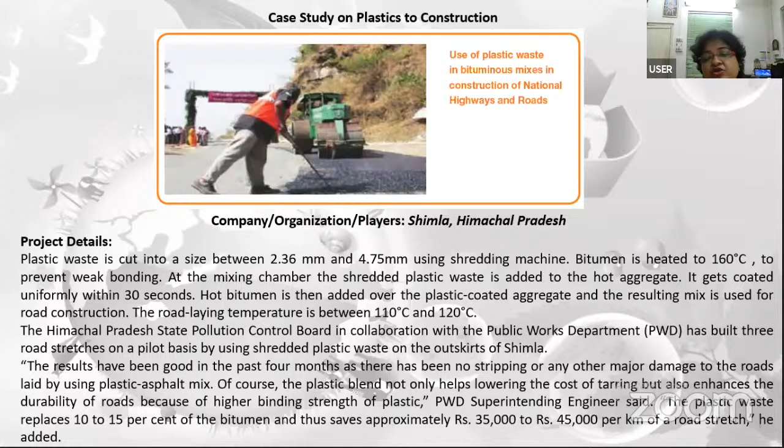This plastic to construction is applicable in case of, and has already been started this operation in Shimla, Himachal Pradesh, where the plastic waste replaces 10 to 15% of the bitumen and thus saves 35,000 to 45,000 per kilometer of the road stretch.

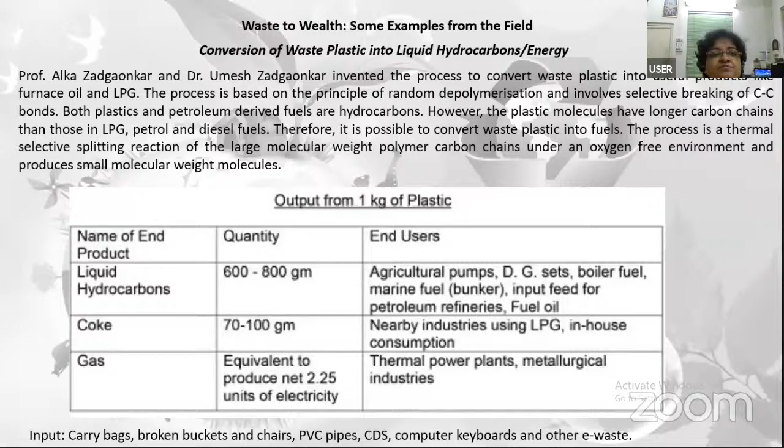This is another output of 1 kg of plastic. You will find how to convert the waste plastic into liquid hydrocarbon energy. These are the methods by which the waste plastic has been converted into useful hydrocarbon.

And this is the construction and demolition waste, how we are going to process this kind of waste, once we stop forgetting about this kind of waste. Now it is found that in case of North Delhi Municipal Corporation, the C&D waste of 500 tons per day is being utilized.

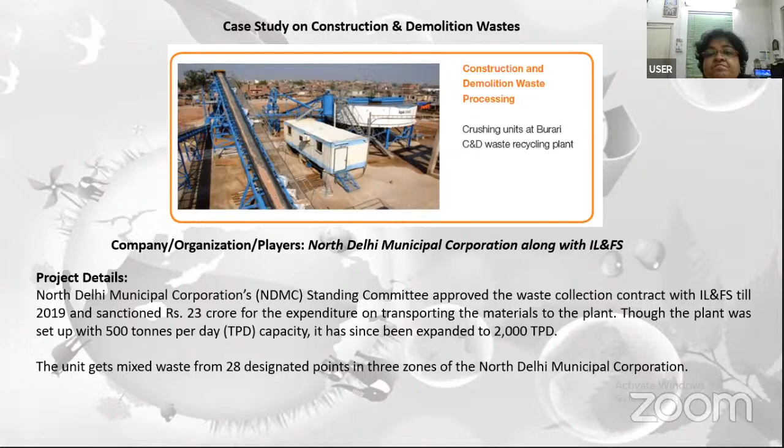And finally, when all the earlier methods have been used, the final option is safe treatment and safe disposal at landfill. But here also there is scope for collection of gas. There is a particular gas collection and control facility, optional for small sanitary landfills, which collects and extracts gas from within and from the top of the sanitary landfill and treats it for energy recovery.

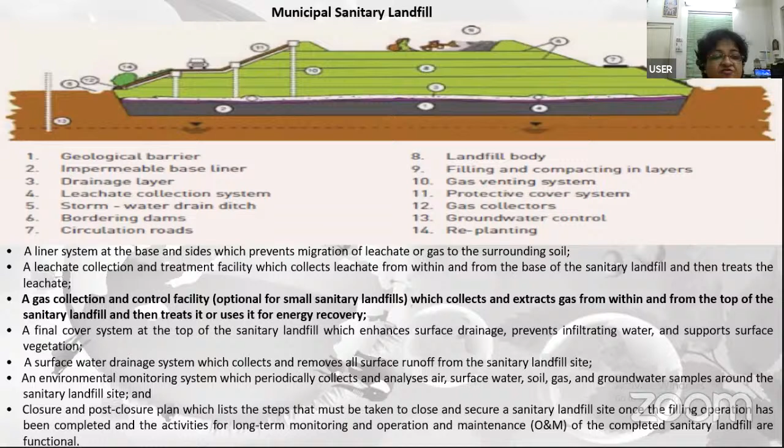Again, I should mention that based on population and quantity of waste, the treatment option will vary. This chart shows, treatment technology wise, how much cost will be involved, and what products we derive, or in which way we are deriving wealth from waste.

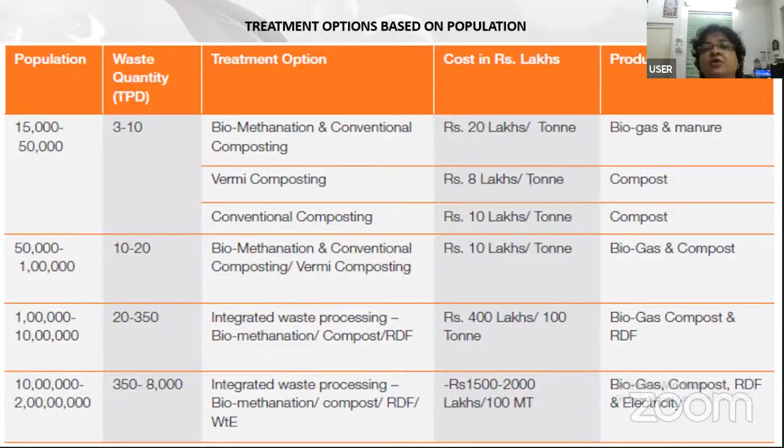This is one particular case found on India's coast, in Vengurla. It is a small municipality from India's tourist hub of Goa, where it is found that 3,000 households separate waste into up to 4 different colored bins. Wet waste is used to generate biogas, which produces 30 units of electricity per ton.

One of the machines powered by the biogas is a plastic shredding machine. It crushes up to 180 kg of light plastic every day. Used with bitumen, shredded plastic is effective in helping build sturdier roads that can withstand more wear and tear. Vengurla has 12 kilometers of plastic road and earns rupees 15 per kg of plastic sold to the contractor for road building.

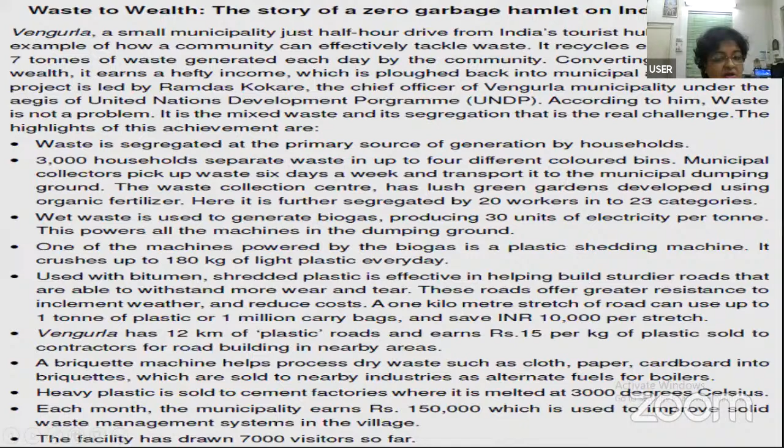A machine helps process dry waste such as cloth, paper, etc., which are sold to nearby industry. Heavy plastic is sold to the cement factory. Each month the municipality earns 1,50,000 rupees, which is used to improve the solid waste management system. So this is the way in which we have to think of the future.